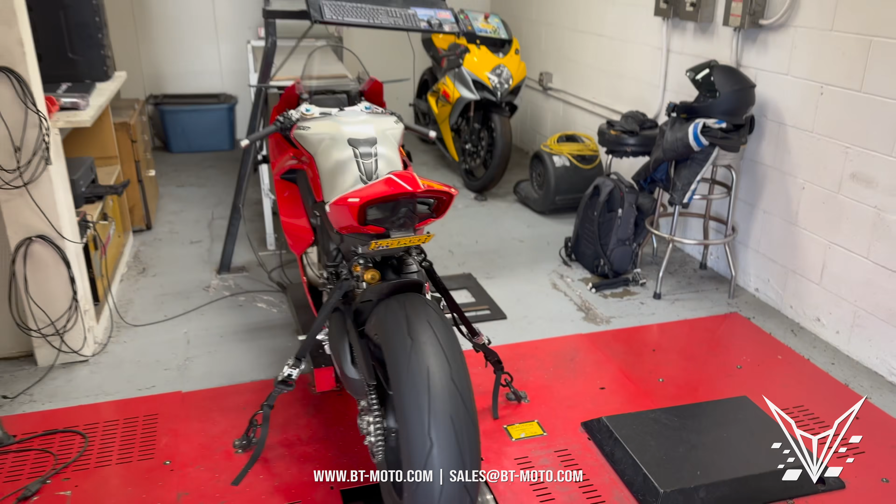What's up, guys? I'm here in Lee Cycle in San Diego, and I'm here with the beautiful Ducati V4R on the dyno. Let's see what she makes. What I'll be testing today is going to be the stock mapping, meaning with no UpMap, and of course we've got the Akra slip-on here. I'll also be testing the Akra UpMap, and I'll also be testing our mapping, and we're going to do all three side by side. Let's do it.

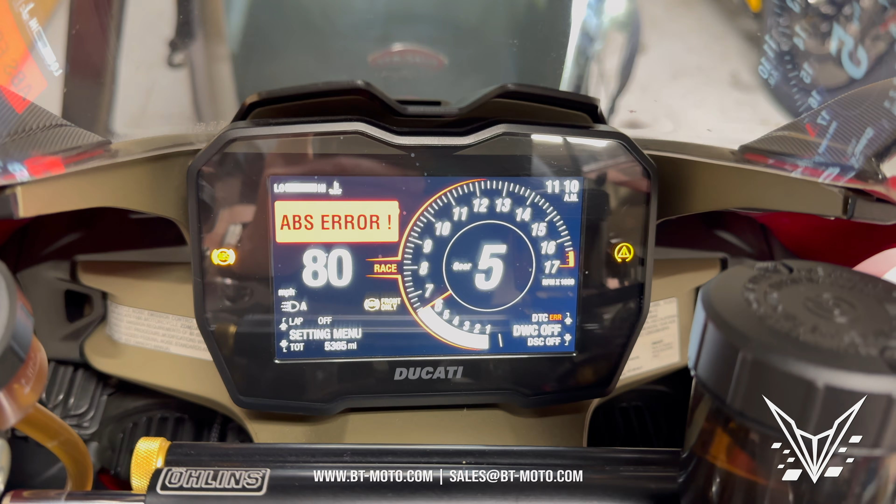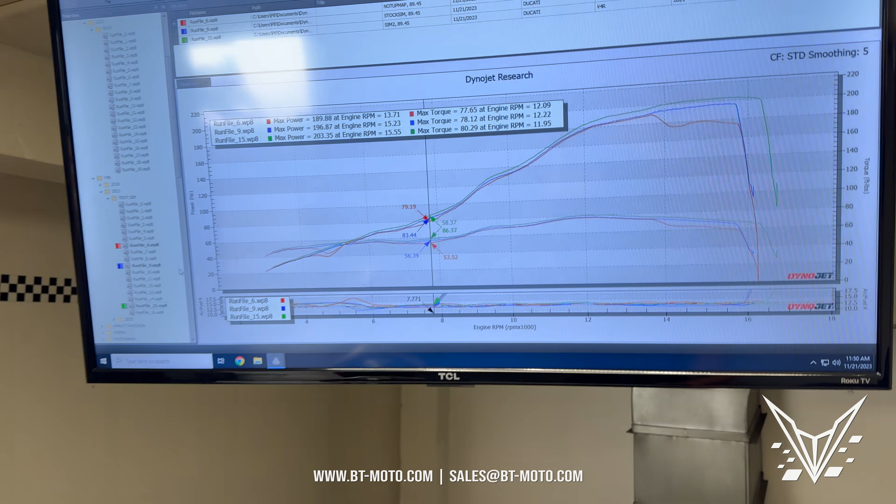All right, wrapped up tuning the V4. Let's see those results. Bam, there we go. Now, let me just explain this graph to you and why I've got three lines going through everything here. Now, first is red. Red is gonna be stock. And red, we've got a max here, of course, 189, and barely touched that 190 marker. And look what it does here. It has this odd dip.

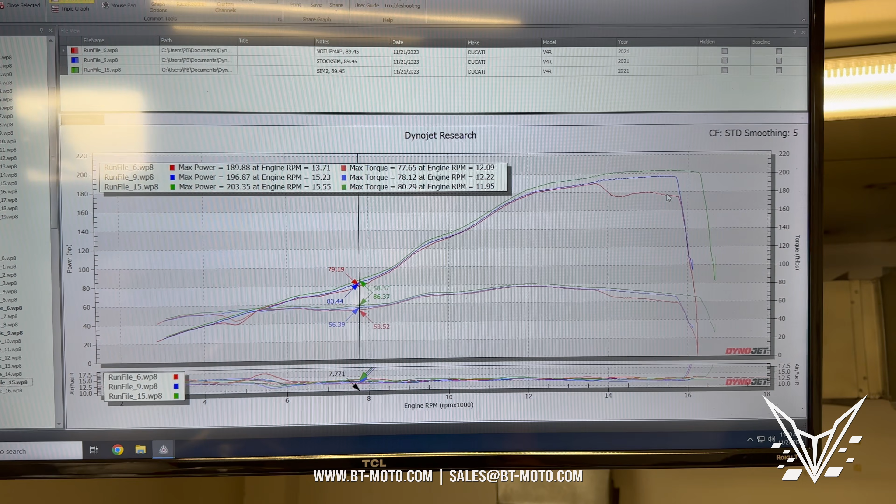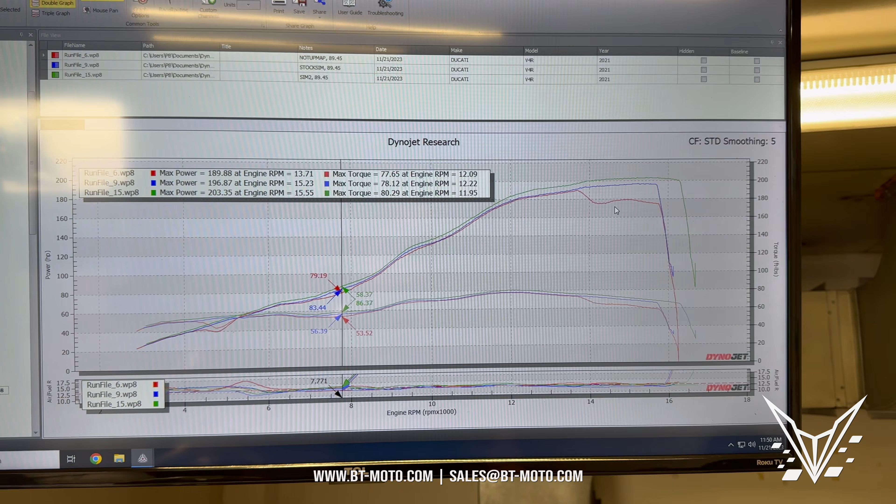Now, I've made a few pulls here on the stock one, and it just kept on dipping and dipping and dipping. Very odd. I don't really see that in the V4R much. Maybe some different software versions do this more, but that's a very odd one right there on that dip. Not really typical. You see that on the Ducati. And because this does have a slip-on, we're seeing that massive lean spike here, and we're seeing it suffer right there in the bottom end.

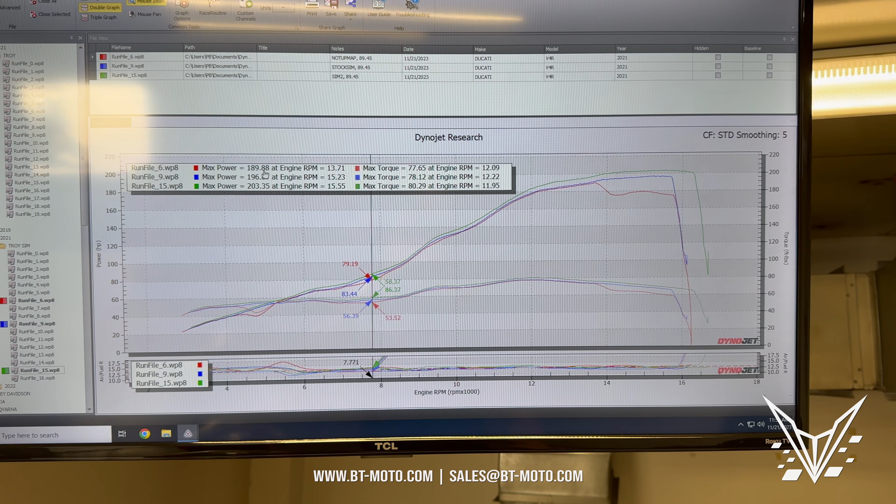More like the mid-range you're cruising light to light, that'll feel like a massive hump, like there's something wrong with the bike. It just kind of loses a bunch of power right there because it's so lean, and that's typical for a piped Ducati. Now, if we're going to the blue here, the blue is the actual Akra UpMap making 196. Which is a respectable 7 wheel horsepower more, even making 1 wheel more torque than that stock mapping.

Now, of course, it's optimized for that Akra exhaust, but you can see right here, we're not getting all the RPM. It doesn't let it loose all the way at 16.5. It kind of stumbles right there at that 16 marker, the same as stock does. But it does carry that power a lot better. It doesn't have that bottom dip. Looking a lot better than stock, let's put it that way.

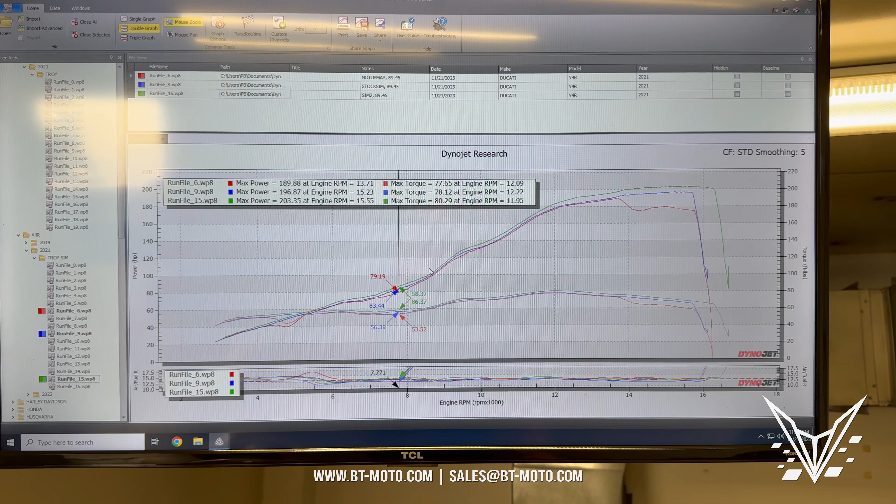Much better option. But for those of you, and most of you who don't buy the Akra, or the people that do have the Akra that don't want to use the UpMap, we have our mapping right here at 203 making, what is that? I'm not great at math here. That's going to be 7 wheel more horsepower from 196 to 203.

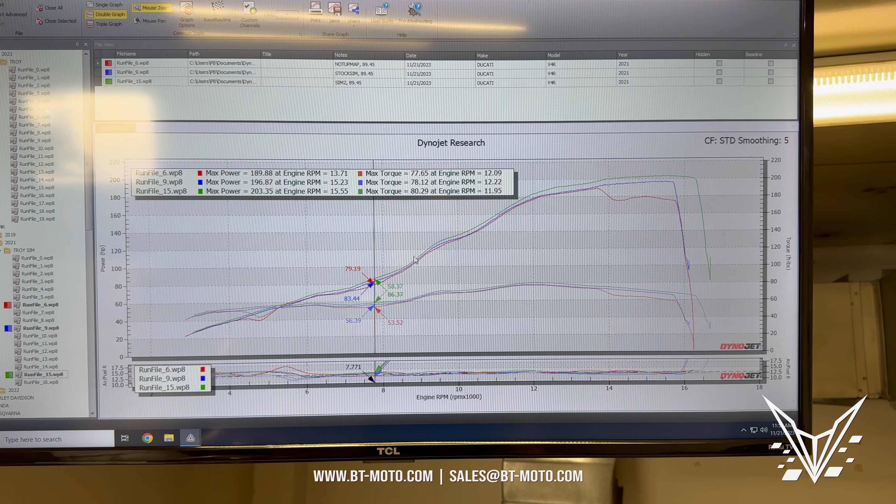And you can see ours at about 9,000 RPM really starts separating itself, even though it really does kind of carry the entire way, maybe 1 or 2 wheel horsepower more. But up here up top, it really starts running away from the curve. And you can see it just carries and carries over that Akra map all the way over to that 16.5 limiter. Now, this is really impressive stuff, and of course we're making 3 wheel more torque than our stock mapping.

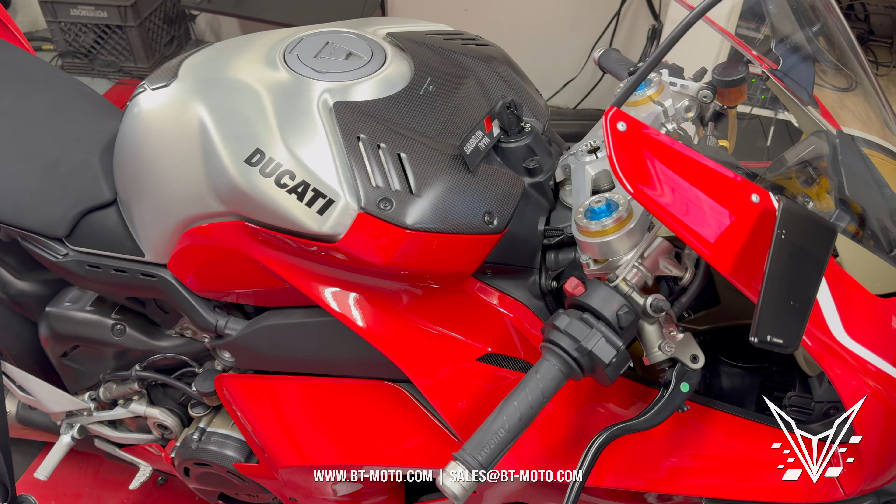So this is all good, substantial stuff, and we're making this stuff by repeating over and over again on the dyno. We do individual cylinder tuning, so we know these bikes in and out. We're even messing with the funnel trumpets or the stack trumpets in the airbox, of when they activate, when they come down, and that's kind of risky, not because it's gonna ruin the bike, but because you can lose so much power that way, guys. So we actually mess with that over and over again to get a good substantial number, to carry a little bit over that Akra number.

And we're also doing, of course, lambda stuff. We're doing ignition. We're doing limiters. We're doing a whole bunch of torque value stuff. I mean, we do the full gamut of tuning on this bike. Now, it doesn't really have top speed stuff, but we did eliminate that weird wandering the V4 does when it's idling. That's gone now. And we also lowered the fan temperature on the bike itself too. So it's gonna run cooler overall and more power. There's nothing wrong with that, right?

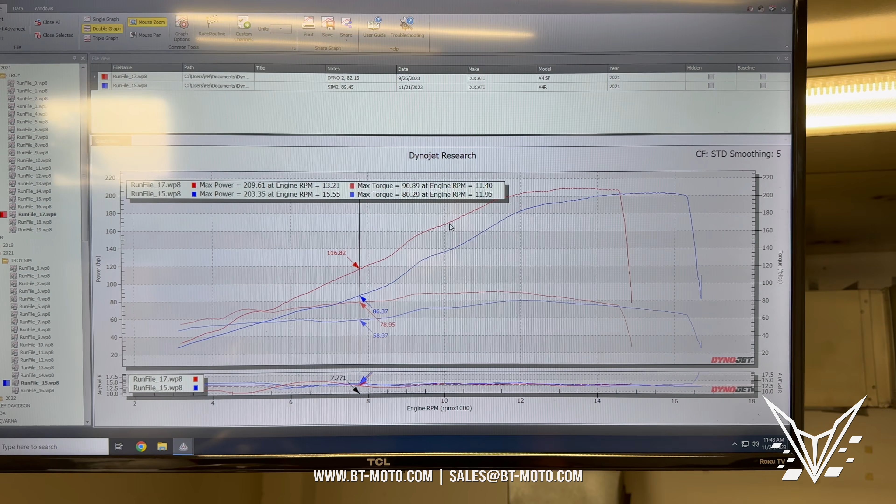Now here's that V4 versus V4R. We got the V4 here in red and the V4R in blue. Now you see that V4 is making 30 wheel more horsepower in the mid-range, 20 wheel more torque, and up top we're about 6 more wheel horsepower. And you're probably sitting there going, well, why would you ever get a V4R? Well, the V4R carries its power further and longer. The power band is substantially longer than the standard V4 here.

Now, of course, the V4 has that bigger displacement engine. That's why we're seeing these kinds of gains versus the V4R, which is under 1,000 cc's to compete in World Superbike. Now, in an actual track setting, the V4R is going to stomp the V4. It's going to completely stomp it. But light to light, or you're streeting a bike, I would prefer a V4. It's a lot more torque, it's a lot more fun. This thing is really light in the front end when you're just riding around. It's a blast. Whereas the V4R at the track is an absolute monster.

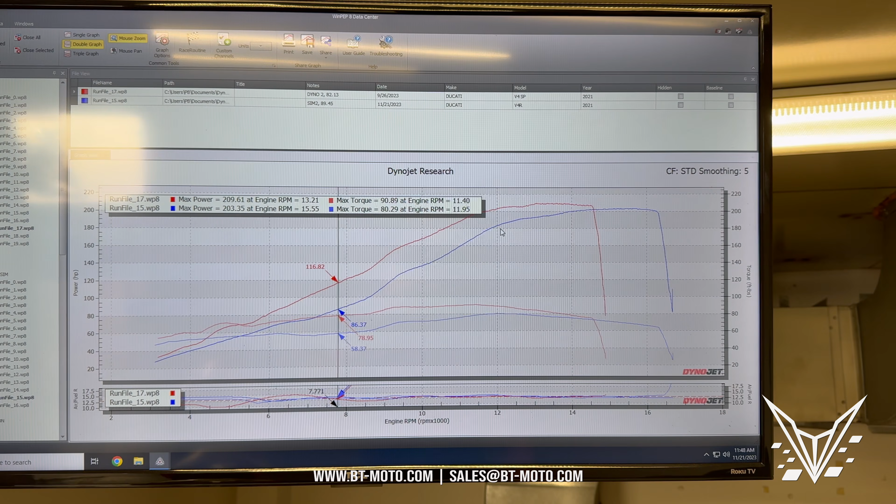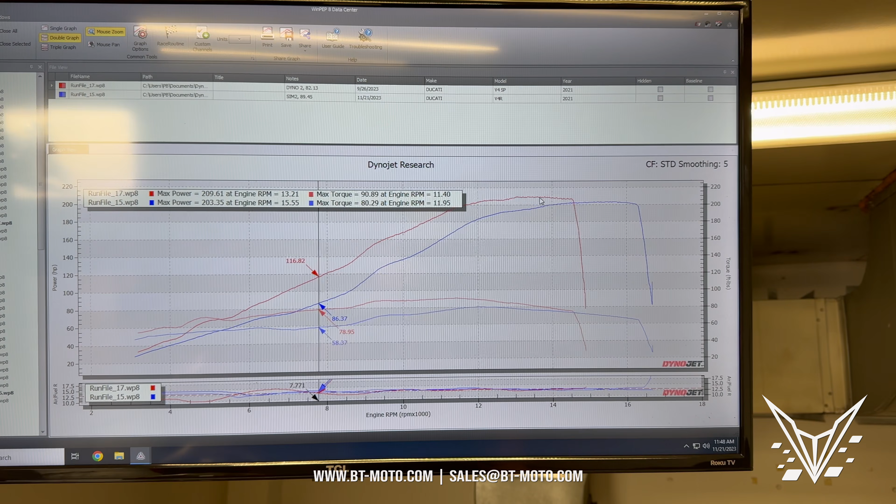And I think if you race these things side by side in a 60 roll, you're gonna see that V4R just cruise right around that V4 up top, because it's got such a wide power band, it just carries in this plateau up top here. Whereas the V4 just hits a number, then stops, hits a number, then stops. This just carries it the entire way. So now that I showed you guys the comparison and we did the before and after here on the V4R, it's time to take her out and see what she does. Let's do it.